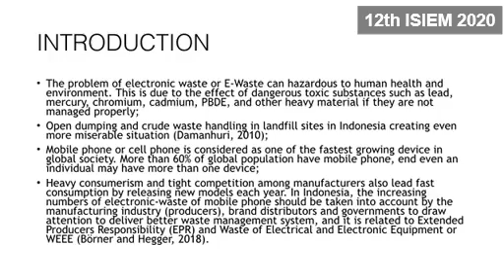In Indonesia, the increasing numbers of electronic waste from mobile phones should be taken into account by the manufacturing industry, producers, brand distributors and governments, to draw attention to delivering a better waste management system. This is related to Extended Producer Responsibility (EPR) and Waste of Electrical and Electronic Equipment (WEEE) (Börner and Hegger, 2018).

This method is adapted from previous research by Börner and Hegger (2018) and Thorpe et al. (2004), which built a theoretical framework by taking e-waste governance, government regulation, and EPR strategy.

Firstly, it will investigate WEEE-related problems with Indonesian government regulations and EPR-related issues by examining the literature of previous studies. Secondly, it would observe waste management problems of mobile phones concerning the EPR cycle in society, by investigating the observed situation of an unauthorized mobile phone service center, to find some insights for the proposed concept.

Mobile phone components will be examined from the aspect of ease of dismantling through simple simulations with standard equipment. This is to see how difficult the component is to disassemble and how it will affect the EPR cycle. Thirdly, alternative design solutions of how the EPR approach might be implemented in the design development of new products.

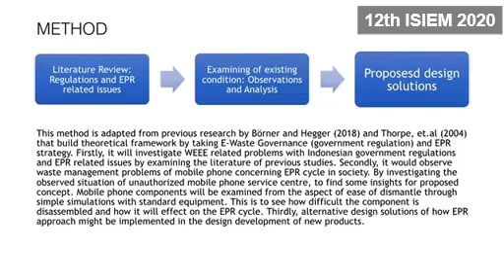EPR, or Extended Producer Responsibility, also called Producer Take-Back (Thorpe et al., 2004), is a policy that should involve a closed-loop scenario in material management, and should thereof be managed and processed by reusing or recycling the materials into new products or other packaging products with less energy consideration rather than producing new products from new material. This approach replaces traditional linear thinking and is based on the concept of supply chain manufacturing systems. Retailers and the consumer all share end-of-life product management.

In addition, recycling programs as part of the EPR, like those existing now, cannot handle all of the hazardous waste from electronic goods.

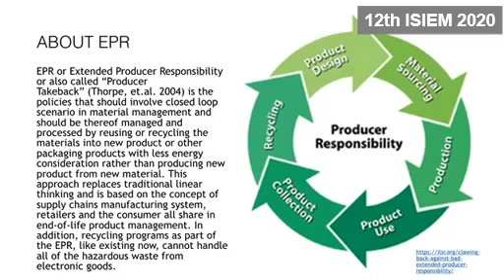End-of-life phase: Huang et al. (2019) implied that there is a strong correlation between durability and recyclability choices. They further explained that more rigid recycling targets would lead to increased recyclability and durability. So in terms of EPR, producers might need to find better recycling methods to find valuable recycling materials in order to create more durable products as well as recyclability.

Huang et al. (2019) also stated that easier-to-recycle product design will increase recycling value at the end-of-life phase, and durable product design will reduce the total volume that has to be recycled, leading to cost reduction as well. An example of design implementation in the end-of-life phase is conducted by Apple, Inc. Since 2017, Apple has been trying to use recycled and renewable raw materials.

The raw material is designed so as not to produce too much waste and to have a long service life. When the product reaches the end-of-life phase, Apple ensures that the product returns back to the company using the trade-in system, and the material will be recycled to become a new product.

The strategy used is to create a circular supply chain with strategies as follows: designing and building products and packaging to make a durable product.

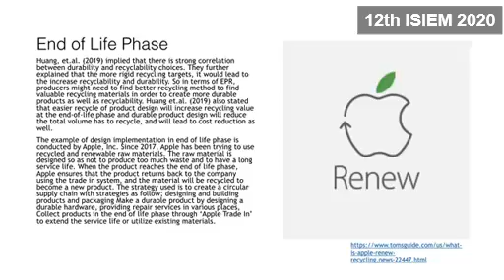The observations were undertaken in an electronic mall to observe the current practices of non-organized mobile phone service in handling e-waste. Parts and components that can still be used were mostly used for personal testing.

There is no special waste disposal site for electronic waste around, and there is no system or regulation that requires the safe sorting and disposal of electronic waste. Phone distributors do not care about broken cell phones or spare parts waste in the individual service center area.

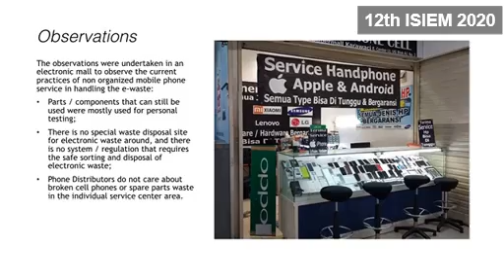The analysis shows that current e-waste handling of mobile phones in Indonesia has not yet implemented EPR, even though there are government regulations that might govern these issues. For example, there is regulation regarding material extraction that should be handled properly by authorized parties, but in reality, there were many neglected actions such as open dumping and dangerous processes.

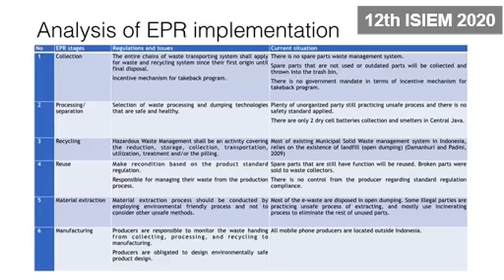For unibody type phones, the use of adhesive makes them harder to dismantle. There are still plenty of mobile phone designs which do not provide ease of dismantling.

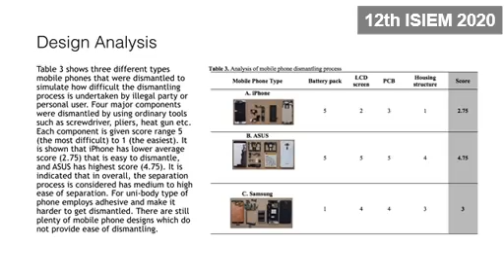The solution proposed is to create a mobile phone design concept that is easily recycled using the extended producer responsibility (EPR) system approach. This will involve users in mobile waste management and treatment systems in a closed loop cycle.

In terms of EPR, this study would like to propose an end-of-life phase design concept focusing on easy-to-recycle product design, Huang et al. 2019, which covers several issues: collecting process, pre-treatment separation, material recovering method, and safe disposal concept.

This end-of-life phase concept is taken into account as a bottom-up approach to see a deeper problem of Indonesia's situation related to the EPR life cycle. The design concept implementation into practice might involve rethinking how each mobile phone component can be easy to dismantle and replace when broken.

Components could be marked so they can be separated directly by mobile phone service parties, whether authorized or unauthorized. This will include the service and system design that relates to EPR application, so that it can comply with government regulation, i.e. Law No. 18/2008.

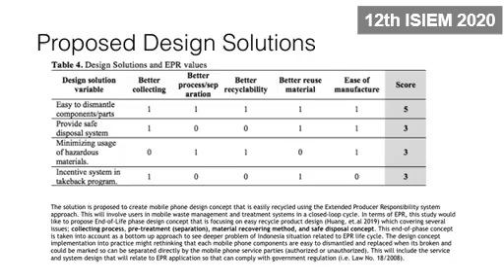The study shows that EPR has not yet been well implemented in Indonesia, especially in handling mobile phone waste issues. Unauthorized service and illegal parties are still neglecting safe treatment due to lack of awareness and technology.

Hence, considering the Indonesian situation, producers need to employ a new design strategy not merely to meet regulation compliance. It should extend the responsibility for better waste management friendly product design that is more suitable for Indonesia's situation, given minimum waste management infrastructure, by involving end-of-life design solutions, better collection, separation, recyclability, reuse, and ease of manufacture.

Further research might be needed to find the correlation between design variables and EPR values through statistical analysis.